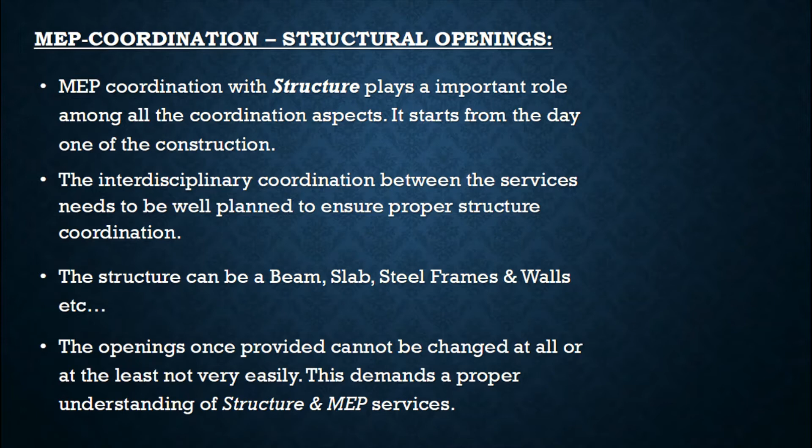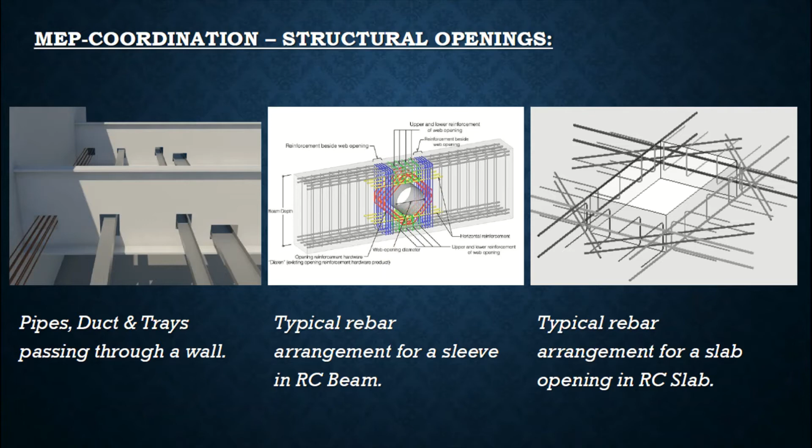And again, these rebar arrangements are depicting a typical standard, and it may vary case by case depending on the slab thickness, the beam depth, or the beam thickness. So this is just for your information and understanding, so that you will take enough care to provide such openings in beams and slabs.

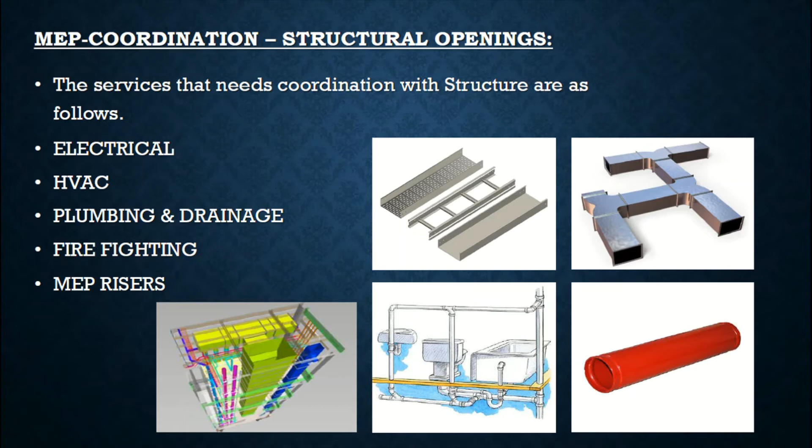So like I said, in the MEP services, we are covering four major topics. Starts with the electrical and HVAC and plumbing and drainage, and lastly firefighting. Here we have combined the entire system, and we are calling it as MEP risers. So basically, we are dealing with the five different strategies of opening for the structural coordination. So let us see each department in detail, and how the structure coordination is needed with each department.

And also we have to make sure that the conduits that we are laying in the slab are not difficult enough to pull the cable. So this is the first stage of coordination, where electrical services is being coordinated with the structural slab.

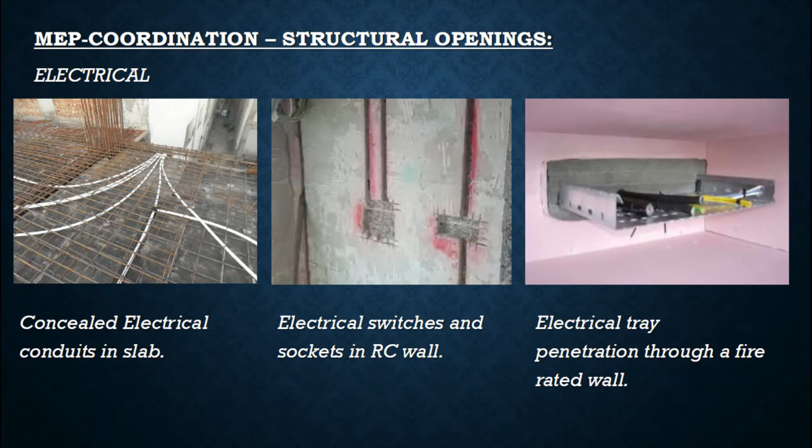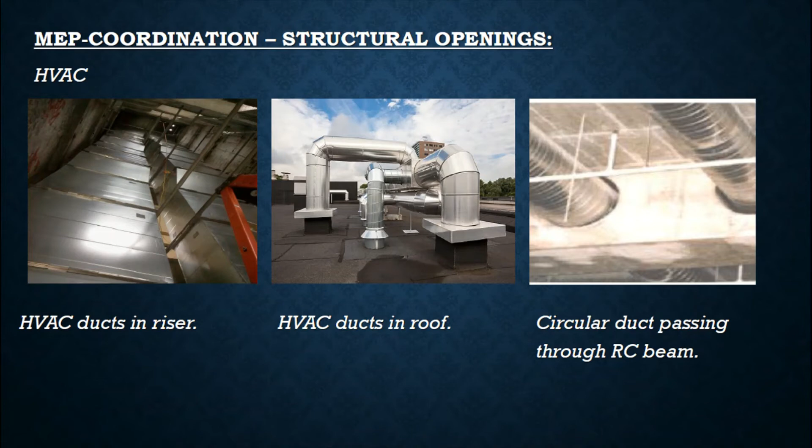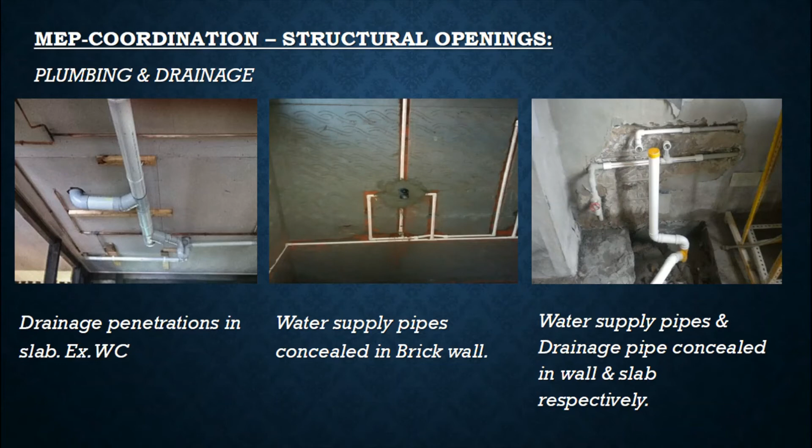And again the similar concept goes with firefighting also. So we have to make sure that the firefighting pipes, wherever it is crossing, whether it is a normal wall or a fire rated wall, we are providing sleeve, and the sleeve size should be appropriate or slightly bigger than the pipe diameter that is passing through the given sleeve. So it should not be very big and it should not be exactly the pipe size also. So the opening should be in such a way that there is enough space for the pipe to pass through, and later we can seal the remaining areas with some kind of sealant to provide fire rating.

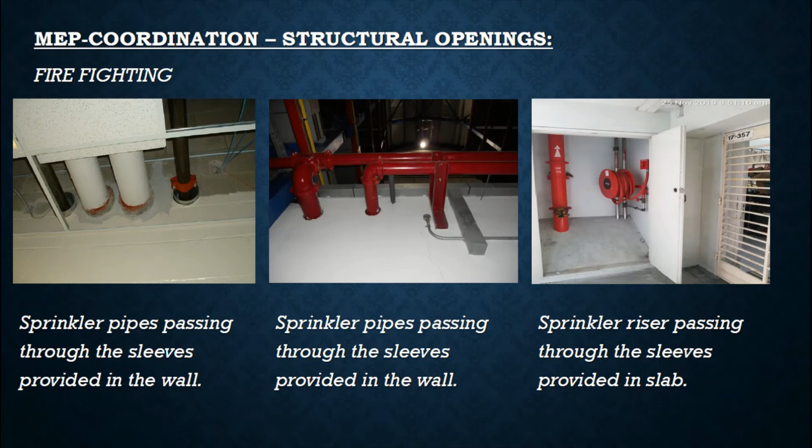So in all the cases, as mentioned in the previous sections, it is very important to consider all the services that are going to pass through the structural side, whether it is going to be a wall or a slab or a beam. Care should be taken that enough sleeves and openings are provided for all the MEP services, and enough clearance between the services has to be maintained also. That clearance between the services is based on the support and the standard technical aspects that we follow for any other MEP coordination.

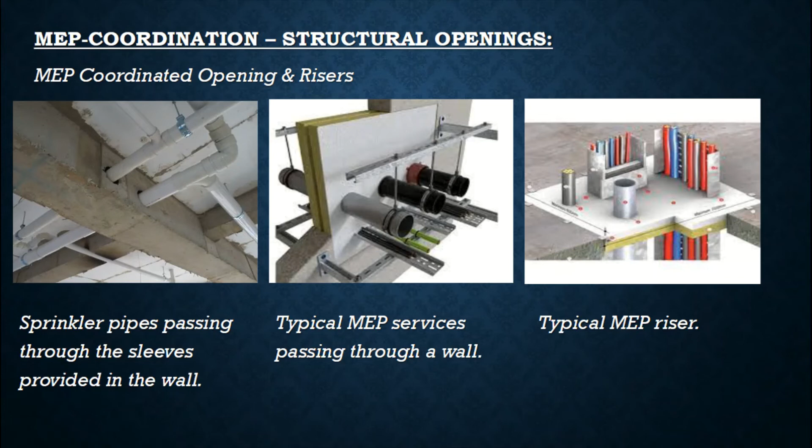And in the image, like we discussed in the previous sections, we are simply depicting the possible MEP penetrations that may happen in the site, and we cannot rule out any services that it will not pass through a beam or a slab or a wall, whatever it may be. So we have to make sure that all possibilities are considered before we go for any casting. In such cases, it will save a lot of time in the later stage during the finishing period, and a lot of time, material and resources also.

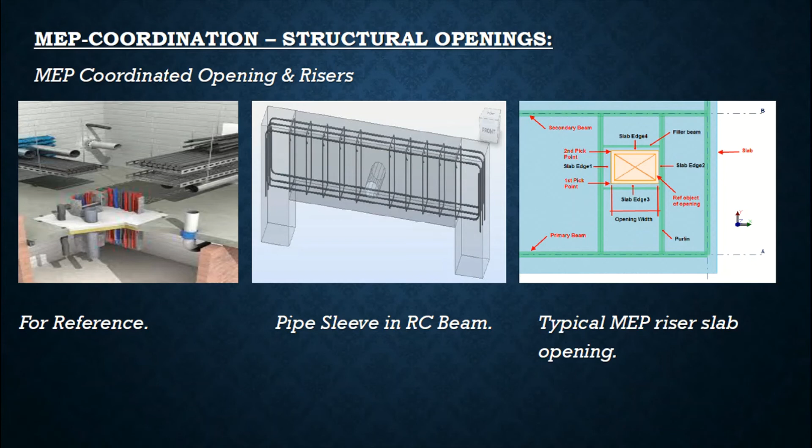So it is very important that we are coordinating all the MEP services with the structure, because missing such coordination with the structure will result in a very difficult routine to manage such problems, because the MEP coordination between the services can be manipulated or managed in the later stage also, whereas the coordination with the structure cannot be manipulated or managed in the later stage, or at least not very easily. So we have to make sure that enough importance is given before we cast the required area, and giving such importance will save a lot of time in the later stage.